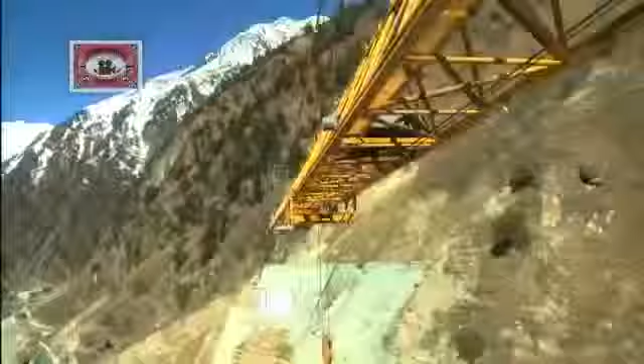There are no half measures in the founder's vision. An approximately $1.5 billion state-of-the-art hydropower project with a capacity to generate 1,000 megawatts. Once completed, it will be the largest hydropower station ever to be constructed by an Indian private company.

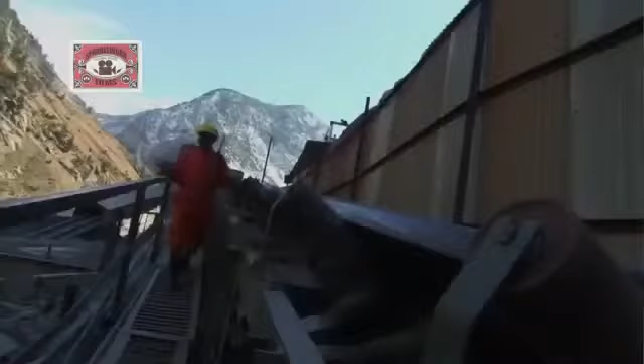When the organization was thinking of implementing the Karcham Wangtoo project, all of us were determined that let us create an aggressive timeline. So we thought let us keep a time frame of 5 years and then we will work out whether we can better it. Now, with the clock ticking, it's all about finding the perfect location.

At first glance, the tiny hamlets of Karcham and Wangtoo seem an unlikely site to realize an ambitious megastructure vision. Surrounded by jagged peaks, prone to sub-zero winters and accessible only by steep mountain roads. But when it comes to the science of generating hydropower, this valley is tailor-made.

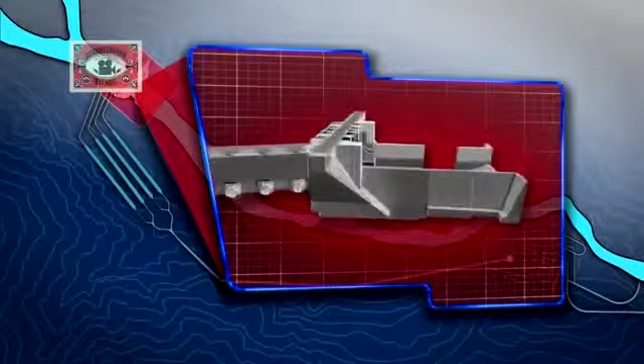The river Sutlej provides the mass of water. The steep gradient between the proposed dam site and the power plant provides the ideal head. The main dam at Karcham will divert a mass of water from the Sutlej into inlet gates. Water will then travel along the nearly 17-kilometer-long head race tunnel, or HRT.

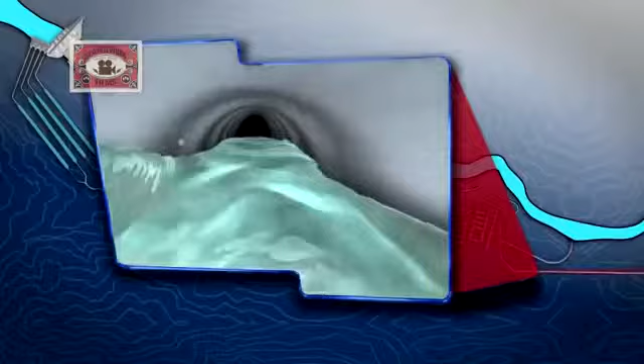From here, it's a steep drop through a height or head into the turbines of Wangtoo's powerhouse. It is here that the river's kinetic energy will be transformed into electricity. Further onwards, the river Sutlej will flow out through the TRT, or tail race tunnel, back on its original course. With the blueprints in place, it's time to set the works in motion.

Strong winds blow across an intimidating landscape, and it's immediately clear setting up this construction site is not for the faint-hearted. In order to realize this onerous task, the builders commissioned their top commander to set up base camp for the men and the machines needed to build this megastructure. Brigadier Upal brings over 35 years of experience in the Indian Army to the Karcham Wangtoo project. Almost immediately on reaching the site, he knows it's an uphill battle.

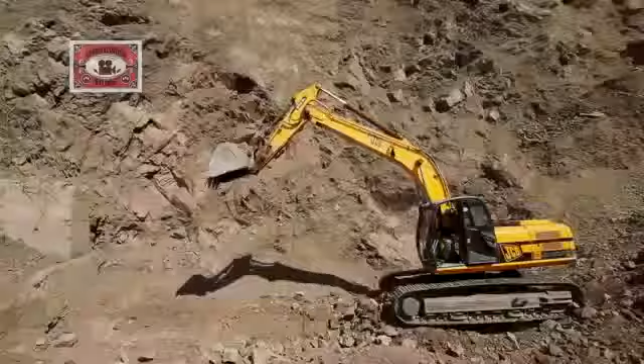In the mountains, it's very rare to find a flat piece of ground. A river flowing and hardly a bank of the river, and the bank was also very low, just running along the riverbed. So to create a camp in a terrain of this kind, we had to literally fill up the whole place with a large amount of boulders, stones, rocks, sand to bring it up to the height it is today.

In just over 1 year, the main camp at Sholto and 7 smaller ones are ready for their occupants, all 14,500 of them. As the brigadier rallies troops at the high-altitude base camp, in the plains below, other contingents prepare for a treacherous journey. Besides vital supplies, these trucks will also carry million-dollar equipment as heavy as 50 to 80 tons. All this on some of the most dangerous roads in the mountains.

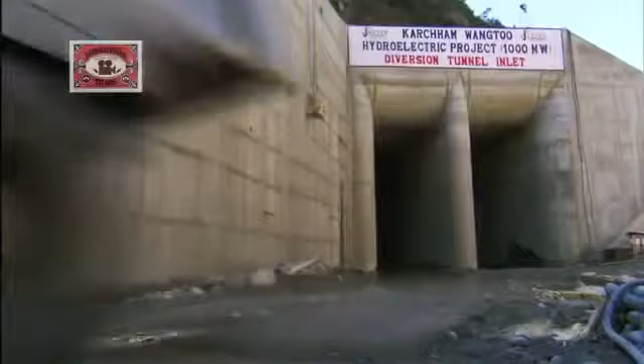Keeping steady pace, the trucks are sent to Karcham Wangtoo. Meanwhile, in the valley below, the task of harnessing the Sutlej begins. Deep in the gorges of Karcham, excavation for the dam's foundation is scheduled. But before digging can begin, there's a river to divert. The Sutlej must be temporarily diverted through a 541-meter diversion tunnel.

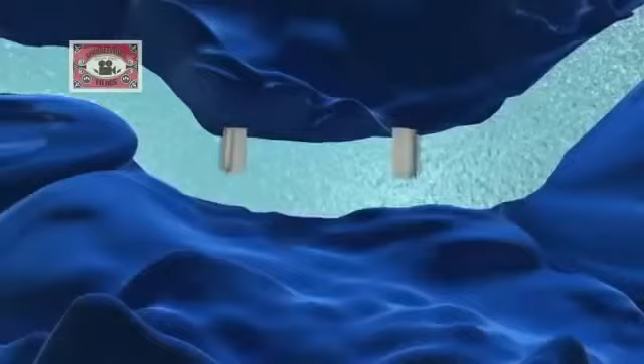Two cofferdams will help maintain the river's new course, preventing water from seeping into the main dam's construction site. Cofferdams are temporary structures, often made from rockfill, which can get washed away with every monsoon. But with the clock ticking on the project's record-breaking deadline, this dam site requires a sturdier fortress. Designers create a cement-reinforced structure that won't need to be rebuilt after the rains. With the Sutlej successfully diverted, it's time now to build the dam.

At the helm of affairs is Civil Works in charge K.K. Sood. He spent the better part of his life building hydropower projects across India. When I started my career about 33 years back, a 100 megawatt project used to take 15 years for completion, and about 10 to 12 years back, a project of magnitude of 300 megawatt used to take about 7 years.

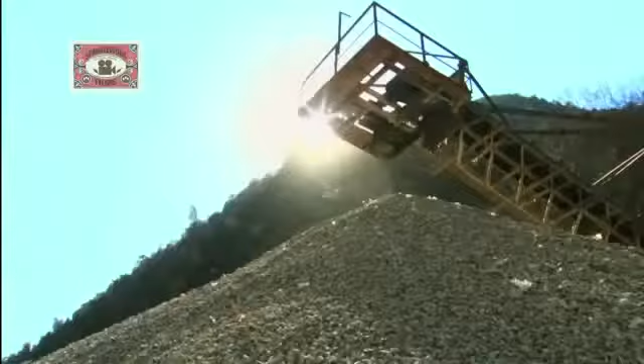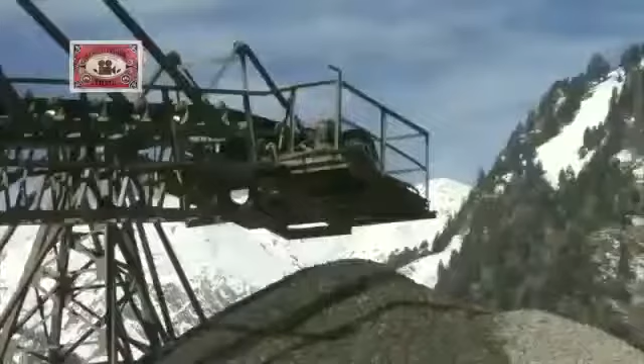Now, K.K. Sood's men must ensure that construction on a 1,000 megawatt project is completed in under 5 years. But as the team prepares for dam excavation, it realizes that plans set by men are often overruled by nature. Geological tests reveal startling information about how deep the dam's foundations would need to go.

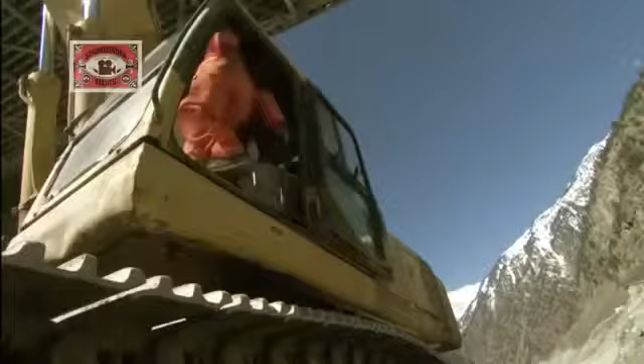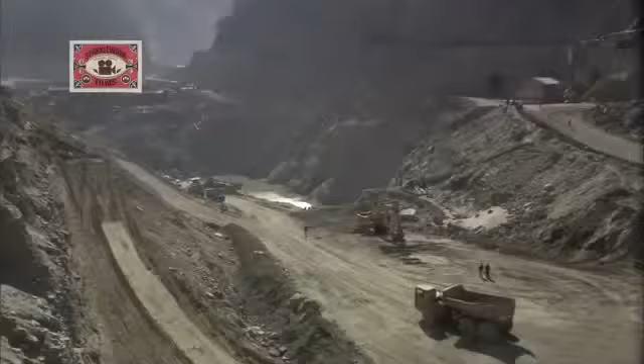Most dam foundations in similar locations go no deeper than 30 to 40 meters below the riverbed. At Karcham, the difference between the riverbed and the dam's deepest foundation level is measured to 53 meters. Engineers now stare at the prospect of going at least 10 to 15 meters further underground. They are faced with two choices: delay the date of completion and miss the deadline, or make way for the big guns of construction.

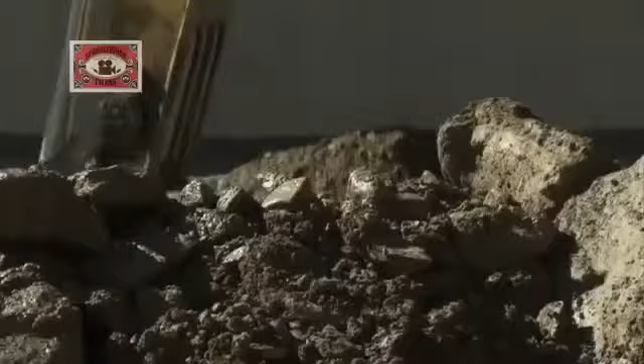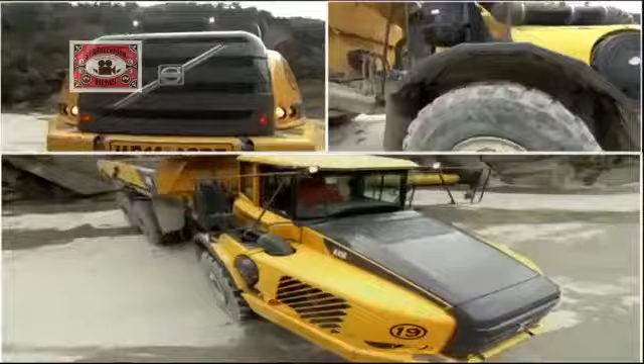Within the stillness of this North Indian landscape, there's frenetic activity underway. The foundations of the main dam at Karcham have reached depths of over 50 meters below the riverbed. Removing the excavated material is a major challenge, one that conventional dumpers literally can't rise up to. So the builders call in the big guns of construction, 6-wheel drive articulated dumpers. Their combination of flexibility with pure muscle allows loads of up to 37 tons to be carried up a height of 1 meter along a length of just 5 meters.

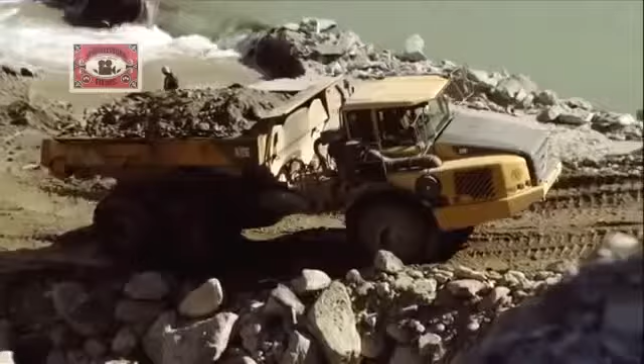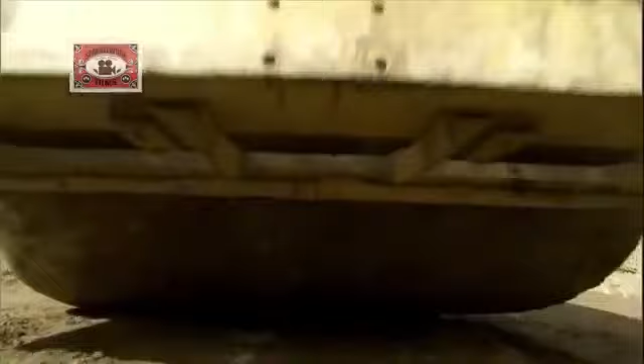While these machines expedite excavation, engineers turn to another pressing concern: securing the cofferdam at depths exceeding 50 meters below the riverbed. The design team takes a bold decision: large-scale cement grouting of the cofferdam's foundation up to depths of an extraordinary 67 meters.

We opted for jet grouted columns. This is nothing but an interlocked row of columns of concrete constructed by drilling holes. We lowered a pipe with a nozzle and pumped the cement grout at a high pressure. So there was overlapping of the columns, and a continuous impervious curtain in the riverbed was available.

As one problem is solved, another one quite literally seeps in. Work on the 1,000 megawatt Hydel power project is moving along smoothly when a minor trickle in the cofferdam becomes a deluge. The river Sutlej seeps into the main dam site, threatening to undo 2 years of excavation and building. Dam in charge Sanjay Gupta rushes to the site.

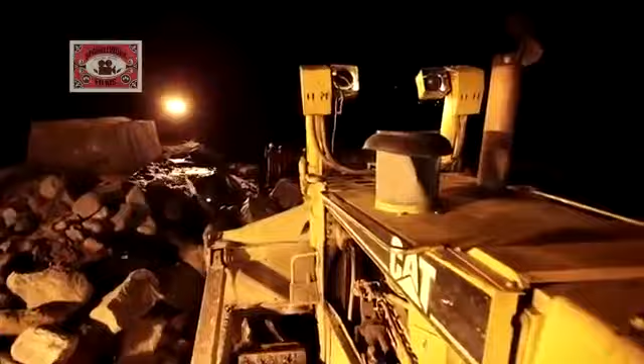Bulldozers erect a wall of rock, while dewatering pumps work round the clock to stem the flooding. Everybody works there. हर आदमी, top management, middle management, lower management, around 200 laborers. That was something different. So you can say total satisfaction.

24 hours later, the worst is over. The team has managed to convert a serious roadblock into a badge of honor. But there are bigger accolades to be earned, ones that will truly render the project a megastructure. Engineer Ashish Bajaj picks his steps carefully inside the dam's intake sedimentation chambers.

Sedimentation is a process that removes suspended solids from water. This cavernous expanse is the project's crowning glory. Its task: taking on the Sutlej's silt menace. The Sutlej carries large amounts of river sediment in its waters. This spells murder for power turbines, where particles as tiny as 0.2 millimeters can shut down massive Hydel plants.

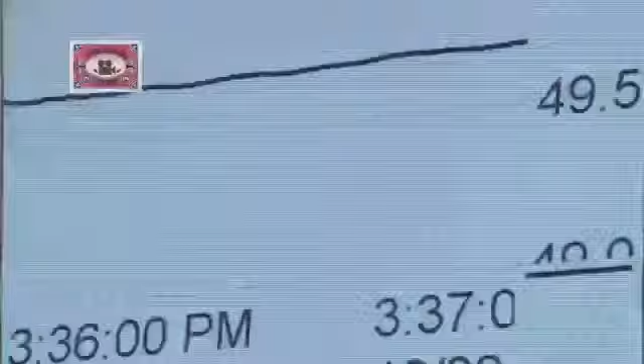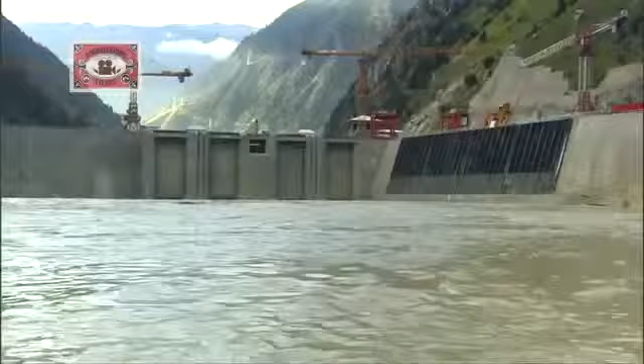To avoid this fate, water is made to enter the tunnel system 15 meters above the riverbed. This ensures that only surface water with reduced sediment flows in. To seal the deal, designers create 4 adjacent sedimentation chambers. Once the dam is filled, from intake it will be 4.5 meter per second velocity of water that will come in.

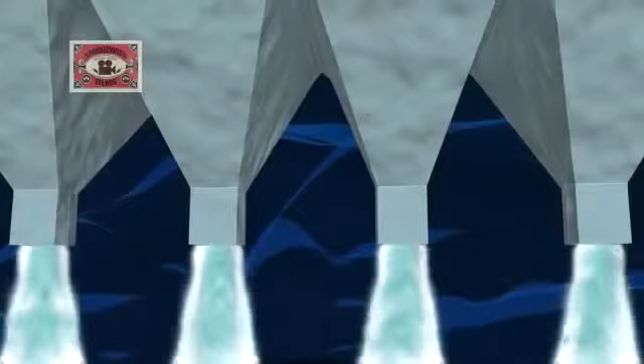And in sedimentation, that chamber has been put down up to 0.3 meter per second, so that the water gets stagnant over here. And there are 53 cones, 53 hoppers, through which these particles will get down to the flushing tank. Gravity guides silt through these 5.25 kilometer long flushing tunnels back into the river downstream. These are the longest flushing tunnels to be found in the Indian hydropower sector.

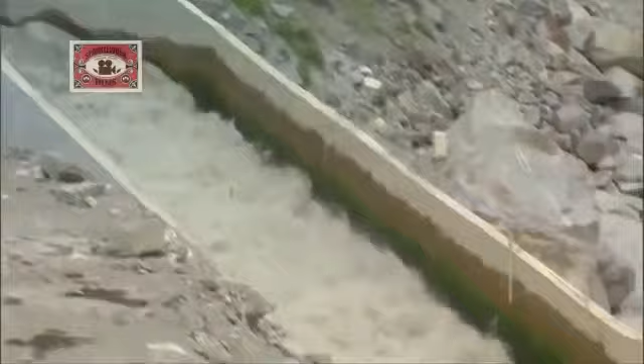But the record-breaking streak doesn't end here. These sedimentation chambers have a design discharge of 504 cumecs. That's a whopping 504 cubic meters of water per second. This is the world's largest chamber volumetrically, and most probably this will be going into the Guinness Book of World Records.

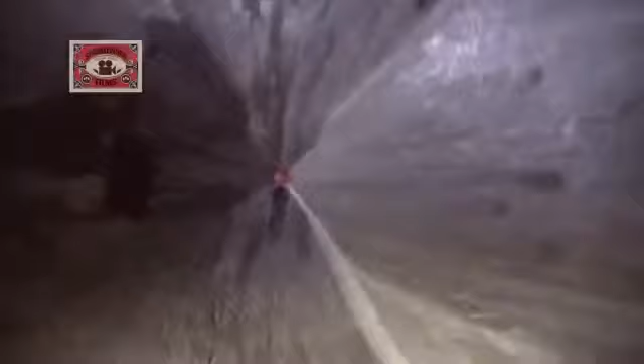This is 424 meter long with 70 meter transitions. That makes it 494 meter with a 35 meter depth and 18 meter wide, all lined. This whole chamber has been reinforced. This is all RCC lining done over here. With the world's largest sedimentation chambers installed, builders have overcome yet another Himalayan challenge.

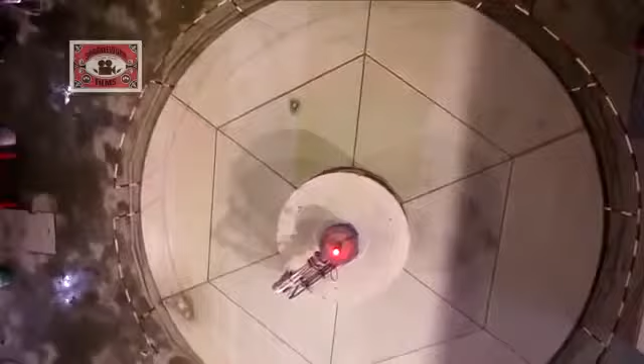As distinct from large storage dams, the Karcham Wangtoo Hydroelectric Project is a run-of-the-river facility, where the Sutlej is diverted temporarily to run electricity-generating turbines. Then it is restored back to its natural course in the Himalayan gorges. Part of this design involves large-scale tunneling into the mountain. Over 44 kilometers to be precise.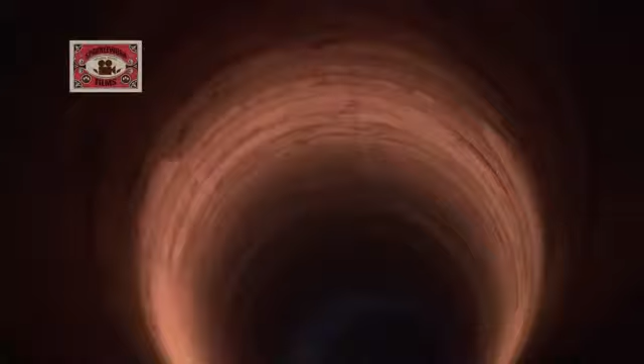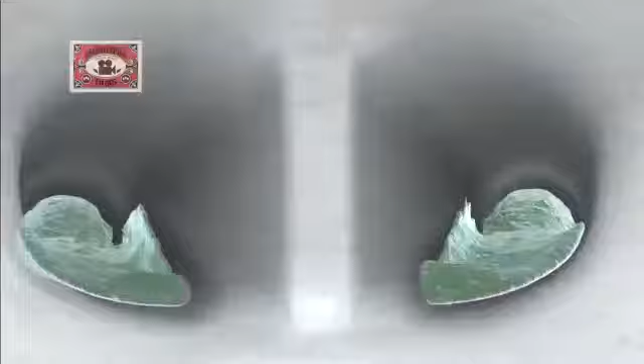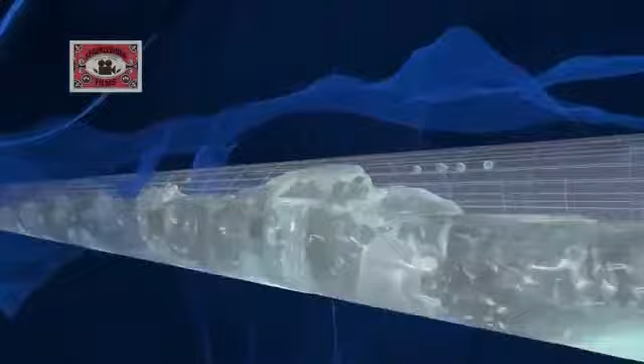Of these, the headrace tunnel is critical to the power equation. It's also the longest. The headrace tunnel, or HRT, is 17 kilometers long, running along a downward slope inside the mountain face. Water taken from the intake hurtles at 4.88 meters per second through a cylindrical tunnel of 10.5 meters in diameter. By the time it reaches the head of the tunnel, it gathers enough kinetic energy to power a 1,000 megawatt power station.

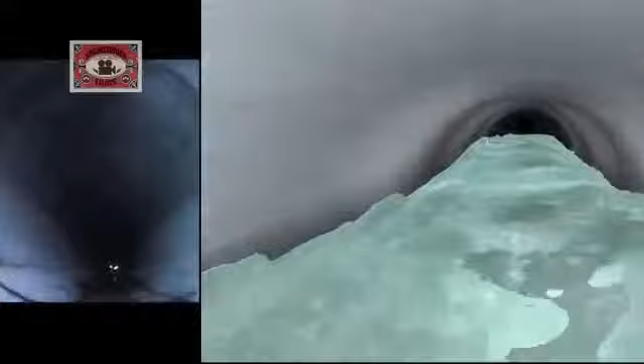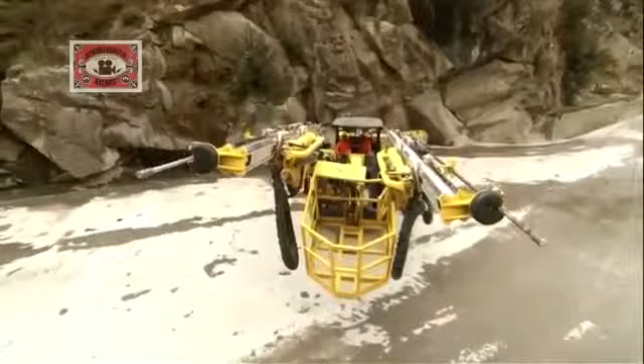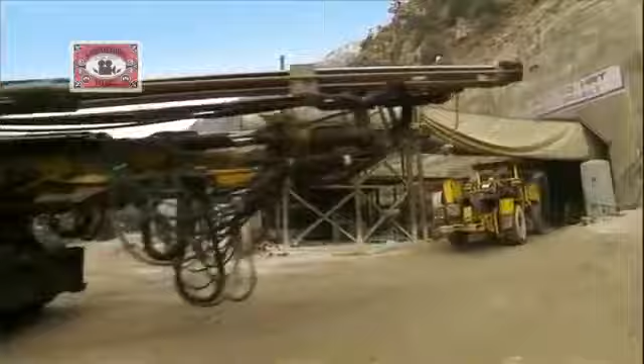But before it can do that, there's some heavy-duty boring to be done. This is the muscle for boring through mountains. Called boomers or jumbos, the project has commissioned a whopping 39 machines on site. The process of advancing is, first of all, we drill holes up to a length of 4 meters with the help of drill jumbos. Then we charge it with explosive, and then the entire charge is fired. After every fire, we get an advance of about 3 meters.

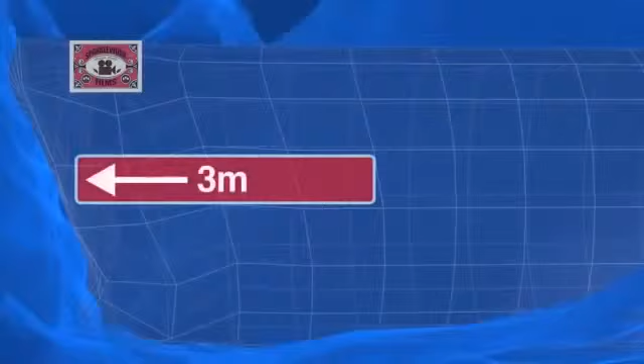For a while, the tunneling team makes good time on advancing along its tunnel path. But things are about to get heated. Soon enough, the builders receive startling information. Workers have run into extremely high temperature zones near one of the approach tunnels or adits. Hot steam is gushing from cracks in the rock face. Extreme humidity and vapors have turned this area into a virtual pressure cooker.

What's going on inside the mountain? The answer will come from an elite group of mining detectives. Builders bring in experts from the Central Institute of Mining and Fuel Research, or CIMFR.

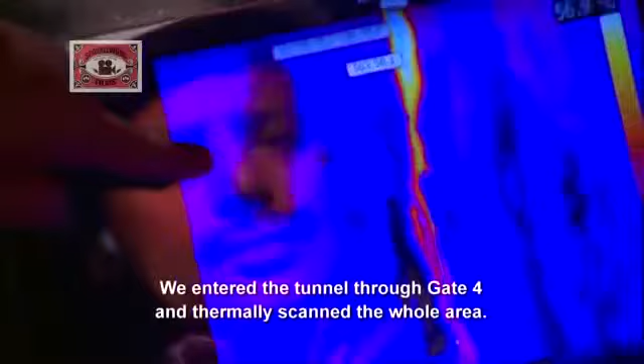Temperature varied between 60 and 98 degrees. Lot of vapors, high temperature.

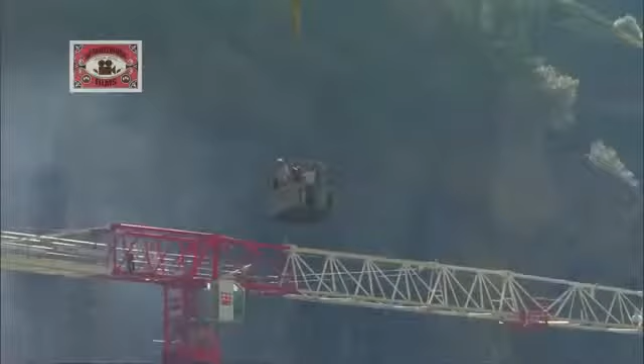Things are getting heated in the Himalayan hamlets of Karcham and Wangtoo. Construction crews at India's largest private hydropower station are facing a pressure situation rarely encountered anywhere in the world. Tunneling into mountains has revealed intense hot zones with temperatures as high as 98 degrees Celsius.

The construction team devises a precisely timed operation. They can't afford more than half an hour to clear an area. Workers rush in and spray cold water on the rock face. Detonators are placed 100 meters away from the rock face. Then the blast is set off. Never before have such extreme circumstances been encountered and overcome in India.

Meanwhile, across the valley, other heights are waiting to be conquered. This mountaintop is the site for the Hydel project surge shaft. It poses a unique challenge for project engineer Samrinder Kumar.

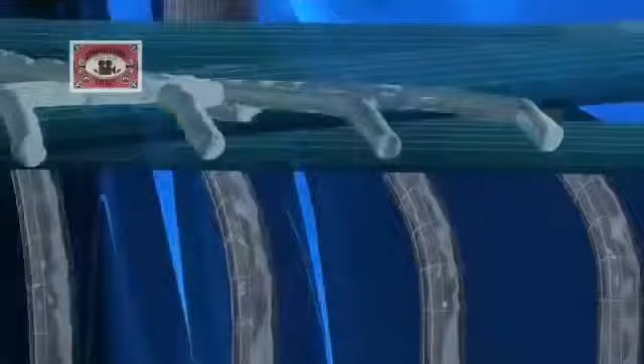Samrinder's team must commence construction on the straw-like shaft that's crucial to ensuring water balance for the entire power station. When water gushes through the head race tunnel, it passes through pressure shafts and drops vertically down into the powerhouse, turning turbines.

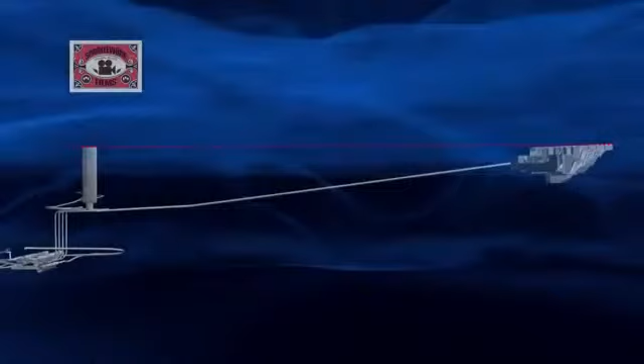The surge shaft is a safety feature to accommodate excess water in case the turbines are shut down for any reason. Built at the same elevation as the main dam reservoir, the shaft also maintains pendulous pressure balances throughout the system. Basic physics of the surge shaft is simple, but building one is far from it.

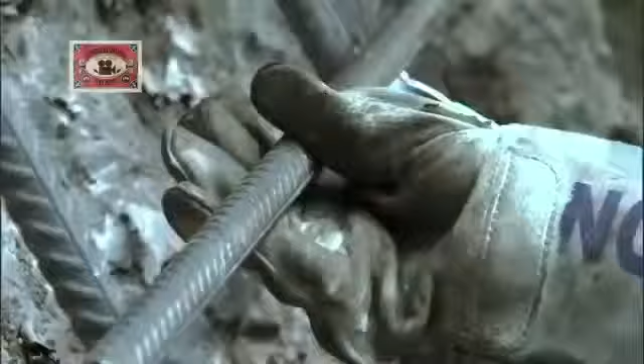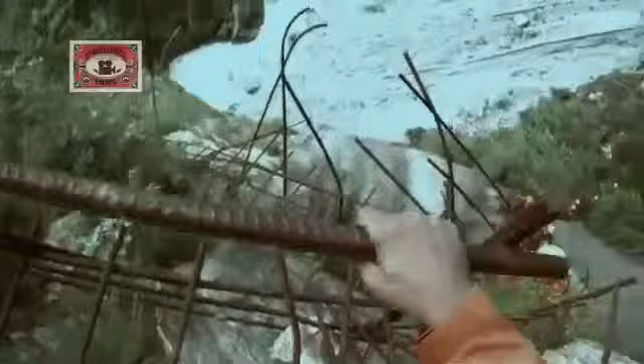Workers climb the 185-meter slope to build the approach road and start work on the surge shaft. Their goal: to complete the approach road without losing a single day of construction. Piece by piece, blueprints imagined by the project's design team are being raised from ground up.

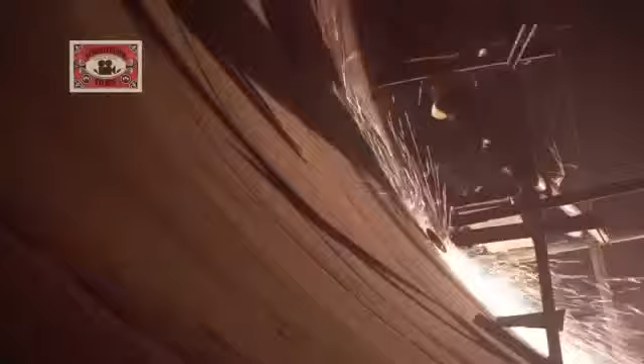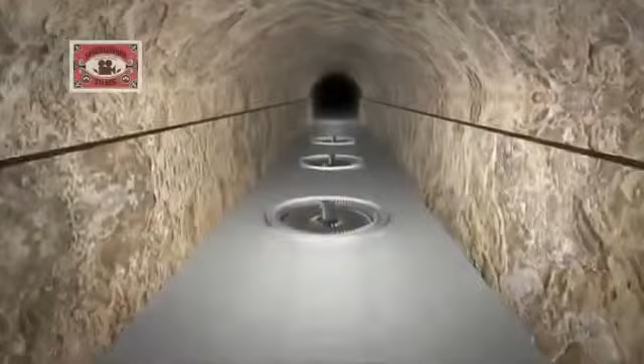Meanwhile, the biggest piece in the power structure is being constructed deep below. Far within the cavernous recesses of Himalayan peaks lies the underground powerhouse of this 1,000 megawatt facility. This is the heart of the Karcham Wangtoo project. It's where the gushing might of River Sutlej transforms into electricity. Keeping this heart beating are 4 state-of-the-art turbines, each capable of generating 250 megawatts of electric power.

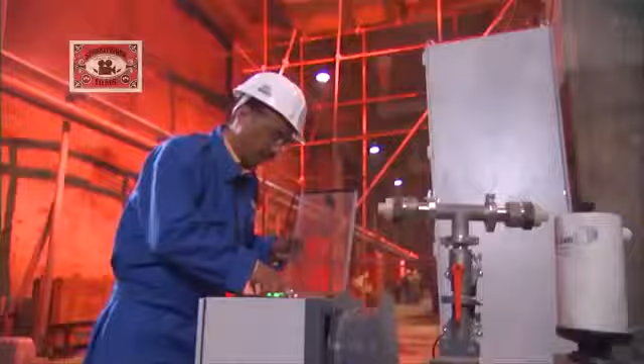Electricity generated in these machines will travel to the transformer hall. Here it will be stepped up, which actually means boosting the voltage of electric current. This stepped-up current will then be evacuated out of the powerhouse through a switchyard into the national electricity grid.

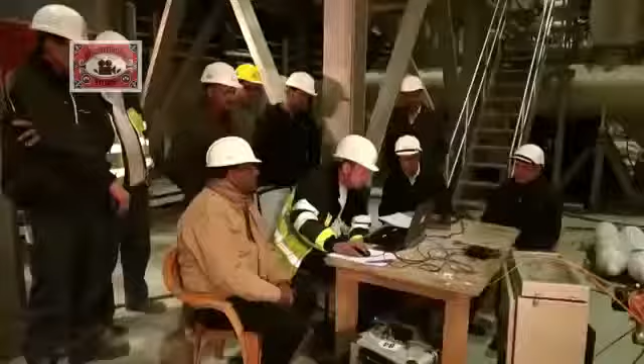At Karcham Wangtoo, veteran hydroenergy engineer Kanti Prasad oversees powerhouse construction and its most critical component, the turbines. The total weight in this turbine, in this generating unit, would be nearly about 700 metric ton. With the powerhouse turbines yet to be commissioned, Kanti Prasad's most immediate task is lowering its massive components into these hollow chambers. It's heavy lifting that will require heavy infrastructure.

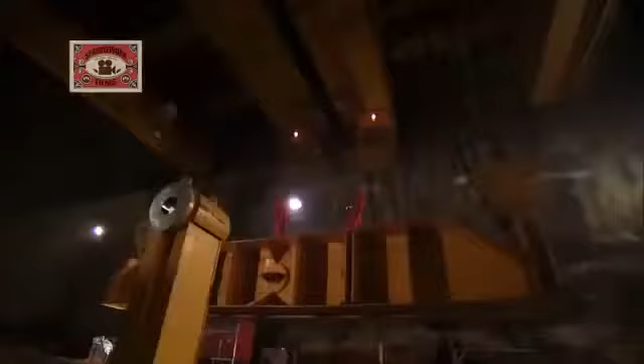This is one of the largest pieces of equipment to be used in the project. The Electric Overhead Travelling, or EOT crane. This mega crane can install loads of up to 275 tons with an astonishing 1 millimeter precision. But it's not just the numbers that are striking. Ingenious designers have used the cavern's natural attributes to create history.

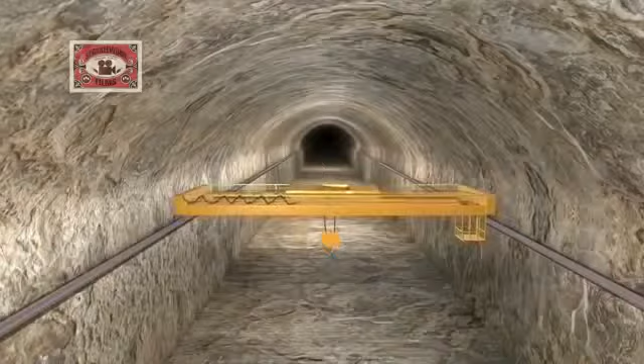We decided to make a ledge which has been done for the first time in the Himalayan geology. We have made a mushroom type of structure in the rock itself, and we have created a crane beam right on the ledge. And on that ledge we have laid our rails, and on those rails our EOT crane is operating. This way we were able to get the crane on day one when we reached the bottom, and we were able to erect our machinery much earlier.

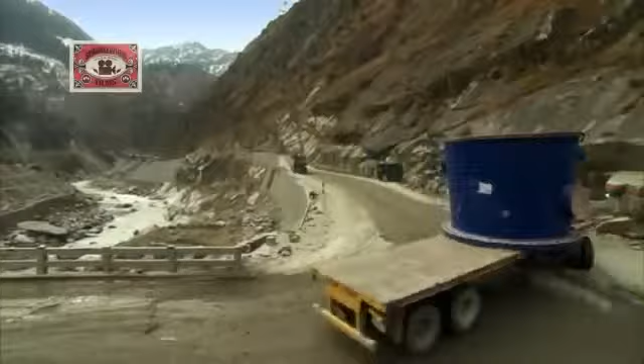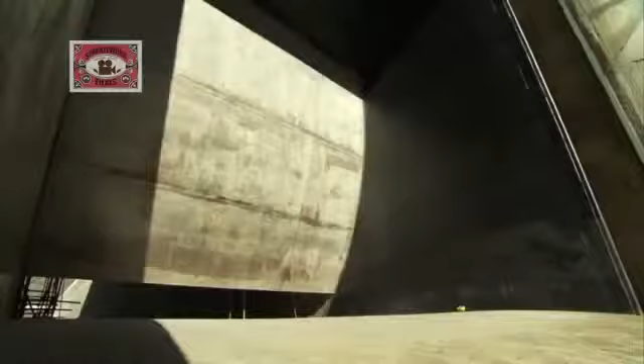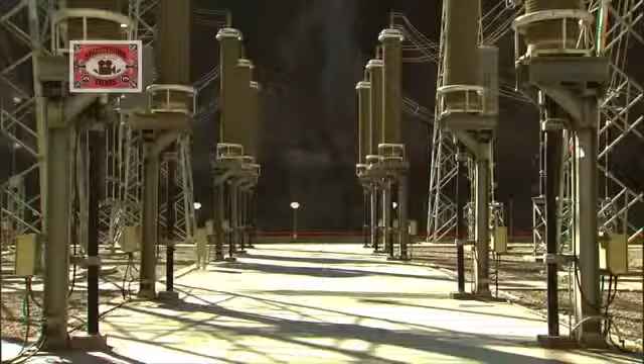At Karcham Wangtoo, works for the 1,000 megawatt Hydel project are nearing completion. It's taken just about half a decade to become one of the fastest builds in the history of Indian hydropower projects. Electricity must now fan out across the mountains to reach the energy-hungry populations of India.

This is the final leg in the power journey. It involves setting up 217 kilometers of transmission lines from the peaks of Karcham and Wangtoo to Abdullapur in the plains of Haryana.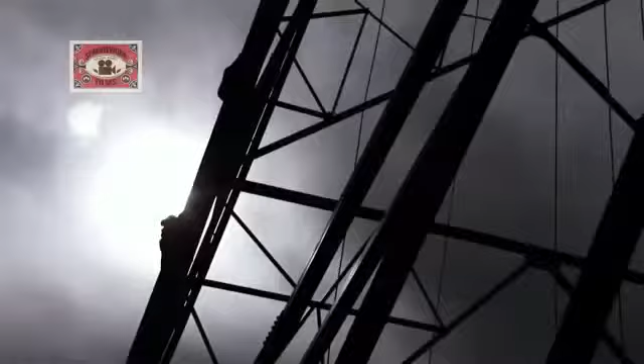The highest altitude we are traversing is around 2,450 meters. The difficulty in this area is that we have very steep slopes where the positioning of the tower itself is a problem. So to negotiate that slope, cut that slope and lay the tower... sometimes the slopes are so steep that a single person cannot stand on that point. In my opinion, this transmission line is one of the toughest lines which we are laying in India.

In the absence of motorable roads, over 500 transmission towers must be built by hand, with materials and equipment transported manually across the harsh terrain. Collectively hauling the nearly 50 tons required to build one single tower, it's often a steep climb through uncharted territory. But where footpaths end, workers must take to even more dangerous ways to cross the valley.

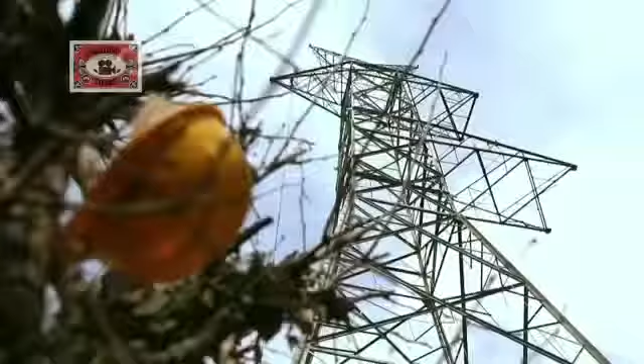This is how workers transport building materials and equipment between two transmission towers, sometimes across distances of over a kilometer long. Once the towers are erected, 400 kilovolt conductors and insulators weighing approximately 30 tons are pulled manually to be strung up on the towers.

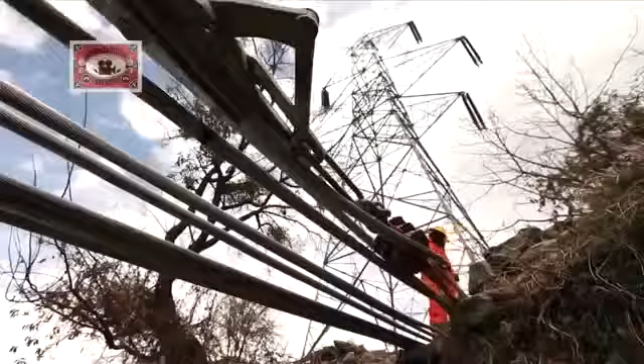7,000 workers have banded together to create a network of transmission towers collectively weighing a massive 25,300 tons. The day is not far when the fruits of their labor will be realized in full megastructure glory. Inside the completed powerhouse, it's a very big day. It's time to lower the multi-million-dollar rotor into its turbine chamber.

475 टन लोड है. High precision EOT cranes take center stage to execute the job.

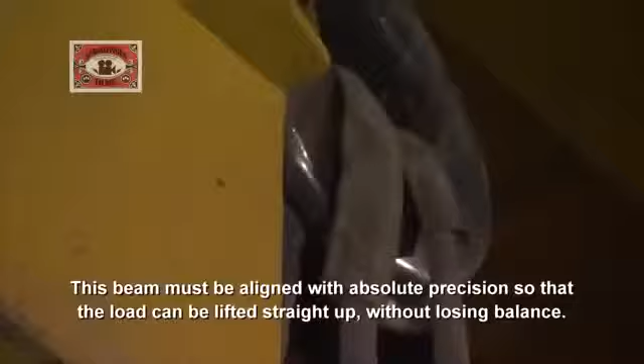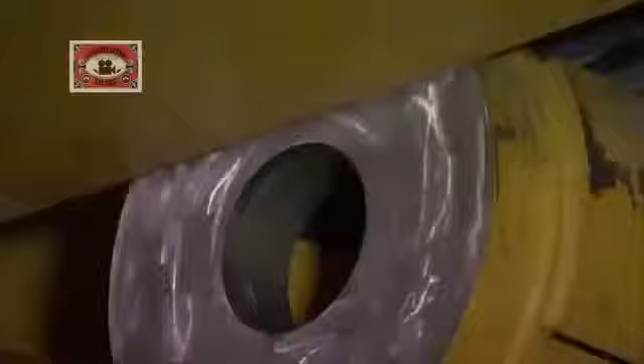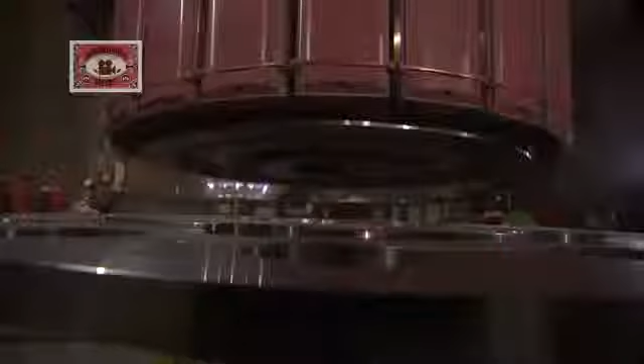All eyes are on the cranes. It's a very precarious operation, with nearly 500 tons of metal and millions of dollars hanging in the balance. This is the heaviest component of this unit, and it is very, very important that it should be lifted and lowered in the pit very, very carefully. Otherwise, a small mistake can play havoc with the machine as well as other components, because the whole load is coming on the cranes. Slowly but surely, the rotor inches closer to its destination.

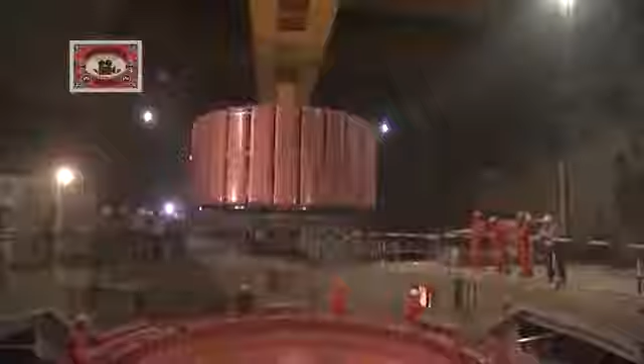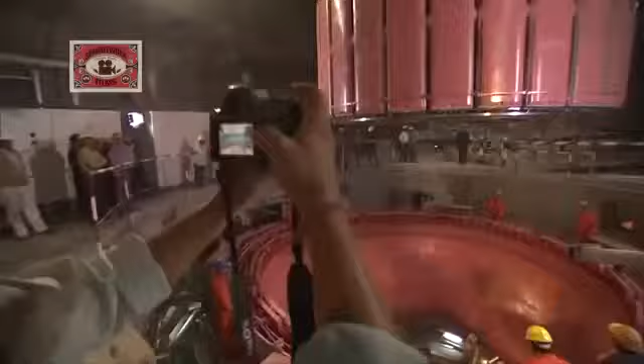On the ground, anxious engineers wait to receive the mammoth component. For the powerhouse team, this is a cliffhanger moment that leaves no room for error. As it lowers, its trajectory is mapped to exact precision. Not a millimeter must be out of sync. It's like a 3-hour movie which you are watching in the theater. Now we have come very close to the commissioning of this unit.

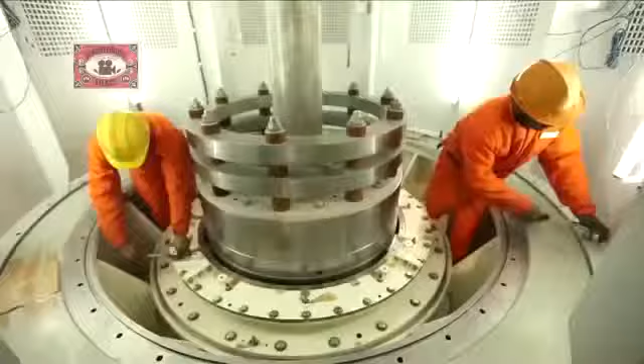Upstream at the main dam site, the gates of the dam are lowered, and the reservoir of the Karcham Wangtoo Hydroelectric Project begins to fill up for the first time. Inside the powerhouse, pre-commissioning checks are at a critical stage. There can be no room for error as the water makes its way across the 17-kilometer head race tunnel to reach the powerhouse's threshold. For the first time, huge butterfly valves are opened to release water into the pressure shaft.

All systems are ready to go. It's time for JP's visionaries to set the wheels of their dream project in motion. It is now on record that in the 11th plan, Karcham Wangtoo project is the largest project that got commissioned, whether it was private sector or public sector space. The JP Group's founder touches down at the remote Himalayan location to inaugurate his company's latest milestone.

Divine blessings are called upon to anoint the cutting-edge facility. The hall crowds with the faces of all those who have worked tirelessly to complete construction in a record time of a little over 5 years. At a specially appointed hour, Jaiprakash Gaur formally commissions the first turbine. The Karcham Wangtoo project is one of the group's crowning achievements.

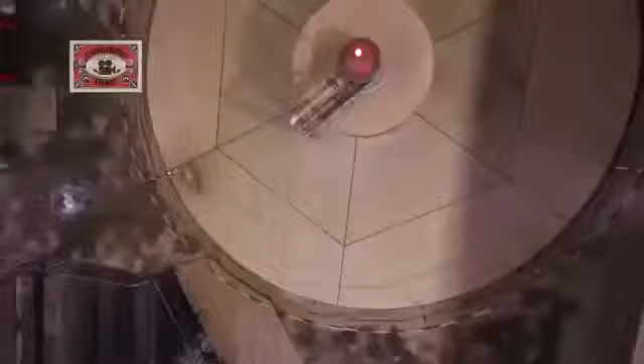I am one of those power engineers who had the privilege of working from 2.5 megawatt to 250 megawatt. So you can imagine my own happiness. With the 4 turbines working to full capacity, the business of powering a nation gets underway.